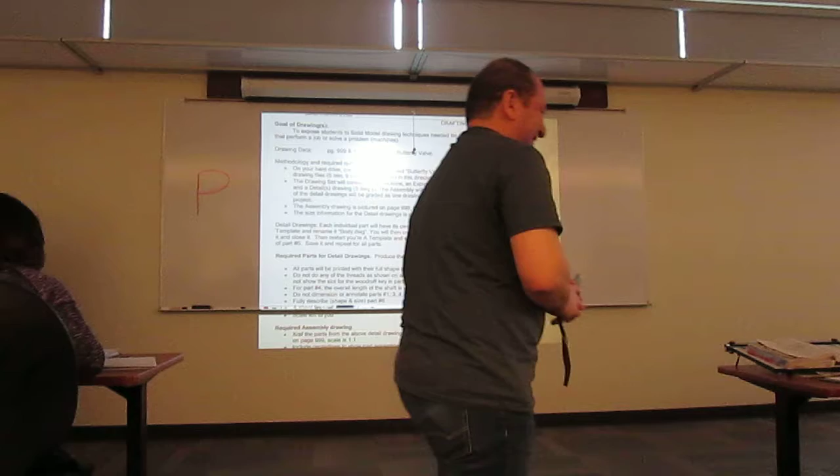all right, when I get here early, yeah, it's sale day. And then I was just like, quick, and they were saying, what's wrong? I'm like, did you see the forecast? We're getting snow tomorrow through for a week. We're supposed to get it tonight. We're still climbing the mountain. Yeah, we're supposed to get snow all week next week. We're just gonna have to bundle up. There's 3 this morning. Oh my. It's like 17. It's just cold. Where is that?

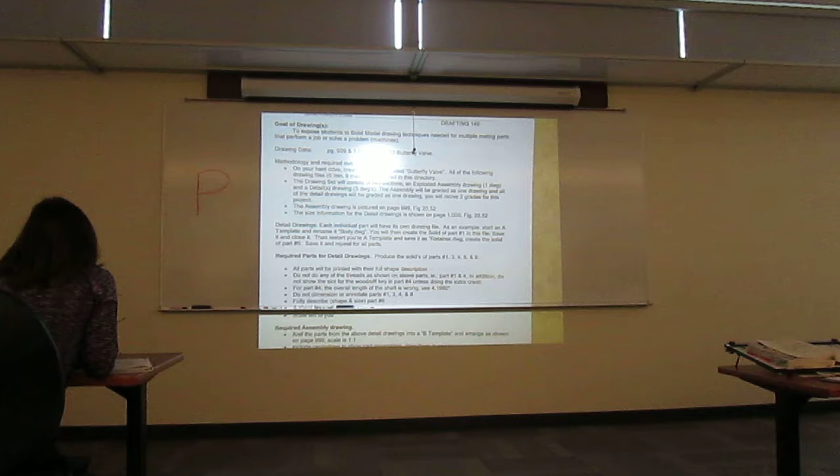You guys that are traveling, use good judgment. Roads are crappy. Hopefully you got a computer at home. You can watch your video. Don't risk your life to get here. I hate missing because of the weather. Like I said, I give myself 2 hours. If I'm not here, they're calling. I would let someone down. Well, the other morning, I couldn't see 5 feet in front of me. That's how bad it was. When it was blowing, it feels like you can't. Not to mention all the accidents on the way. Sometimes you go 85 miles an hour; just slow down to 45. All right, let's get started. I'm not waiting any longer. We got lots to do. Thank you.

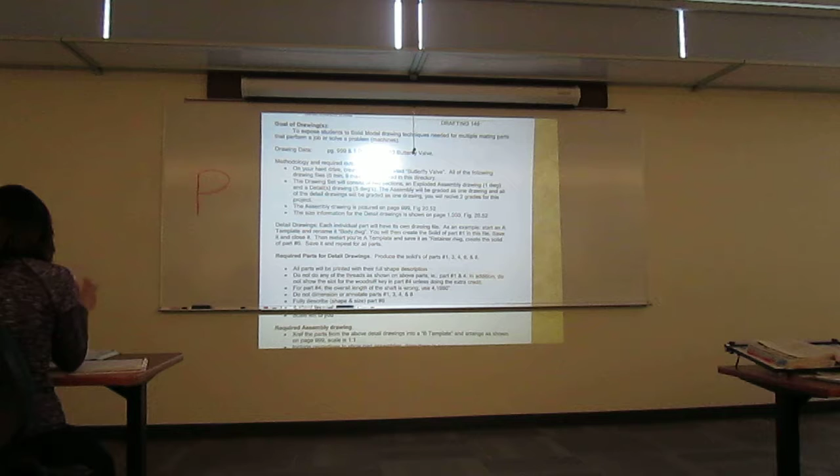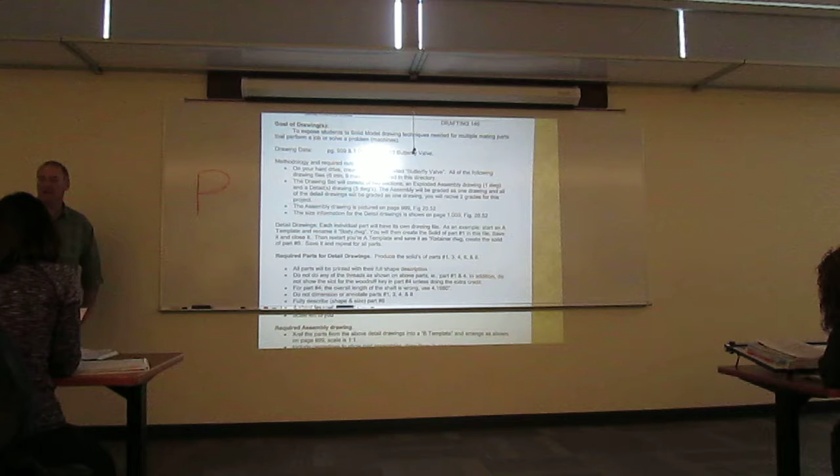All right, so I gave you the last 2 assignments and I want to explain these now. I think some of you are probably ready for assignment 5, which is the one I've got up on the overhead. I wanted to give you number 6 too, which will be your last one, because I want you to start thinking about it now. I'm hoping you're started on it by approximately next Tuesday. Now keep in mind that this class, I hope to have it done by a week from today and testing on it, but you're gonna have a couple extra days to draw after that.

We will start architectural drafting on the following Monday. You need to have that architectural book. If you don't have it yet, get that thing here, because we will have a few days of information before we can really start drawing. Okay? So you'll have a little bit of time to work on that last project also.

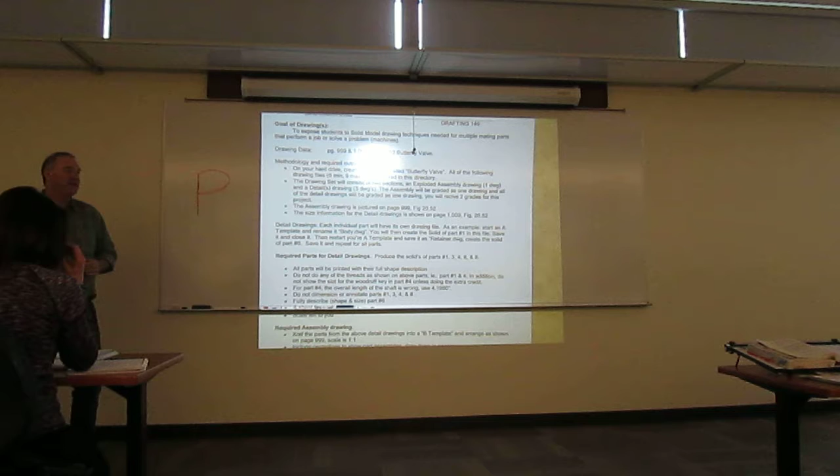All right, so this is really kind of a nice project, and I think it ties this whole thing together on solid modeling. Okay? And it puts it into a sense that many of us will end up working in this arena. So this is a real life type of situation. In fact, people are doing this today out in Twin Falls, as part of getting paid for it, which sorry to say you're not, but we give you good practice at it.

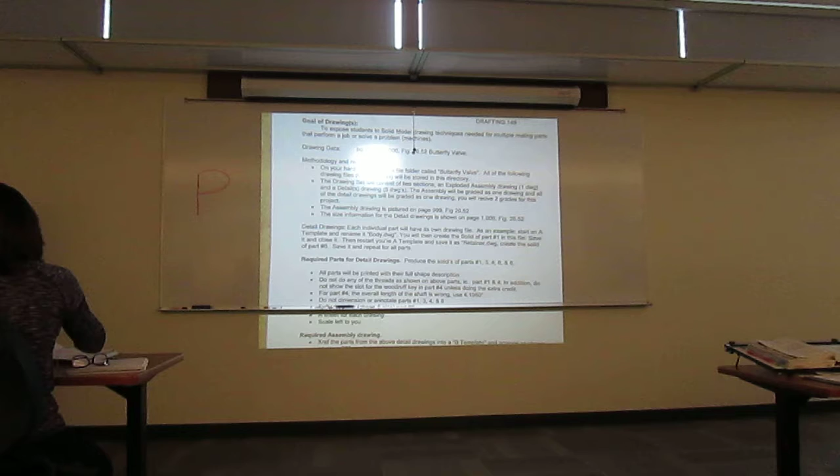All right, now I tried to explain quite a few things here. One thing, you're going to have a bunch of files that you are managing together. So I would highly recommend that you do a little sorting on your hard drive. Create a directory for where all this stuff's going. So on mine, I've got a file folder called draft 149. Underneath that, I'm going to create another directory and call it butterfly valve. And all of these files that I use are going to be stored in that directory, because you're going to have to use these files together.

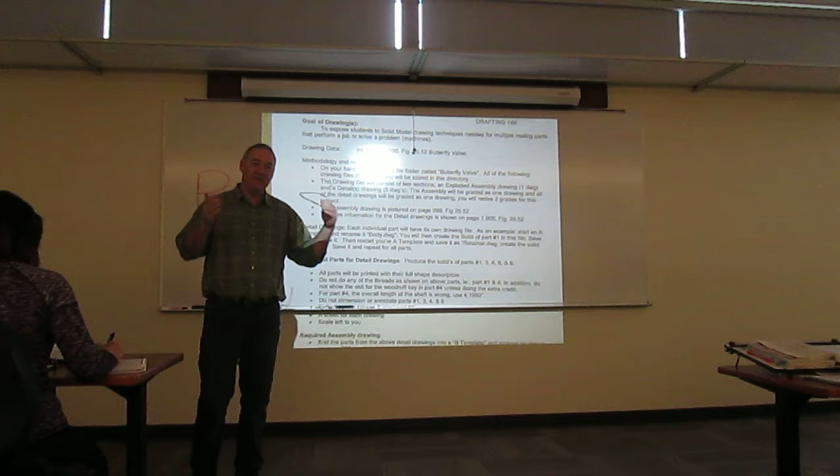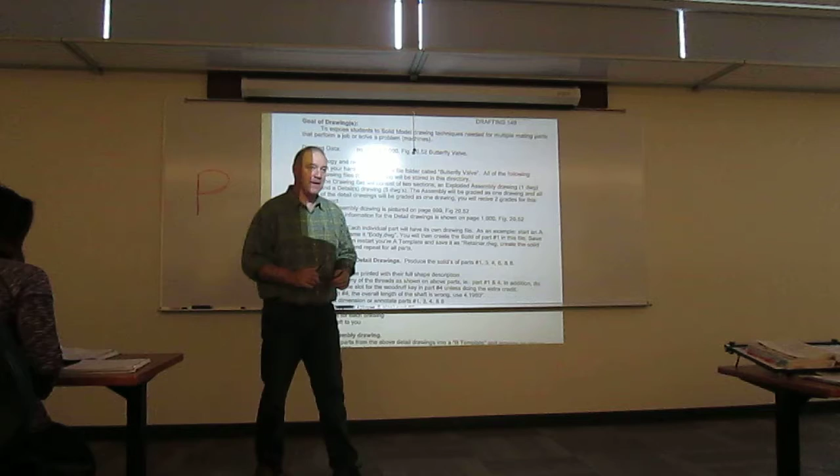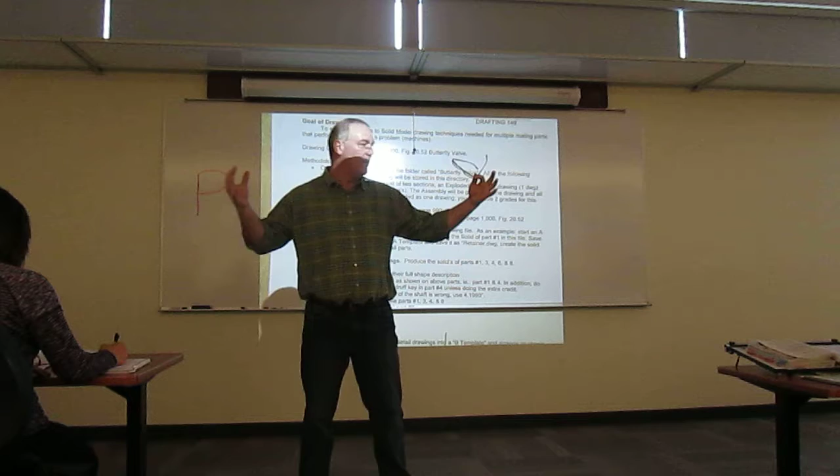Now, when you come through, we're in essence going to have a drawing set that's done in a mechanical sense. When you put together a machine in the mechanical world, you have a drawing set that shows how it's done. The first drawing in the drawing set is an assembly drawing, which shows how all these parts fit together so that somebody can assemble the project.

Following that, we have what are called detailed drawings, which are usually standalone multi-view drawings that we can rip out of the package and hand to a craftsman and they can build that part. Okay. So you've got first one's an assembly, and you might have sub-assemblies in assemblies because the assembly process might be fairly complex. But you'll have something showing how it all mates together, and then you'll have the building information in sheets that follow it.

And these can be very extensive. I mean, think of a car engine. The drawing set for a car engine is probably easily 1,000 pages of nothing but drawings. So many sub-assemblies and assemblies. Now this one, we're just going to do a valve. So we can do all this in one part.

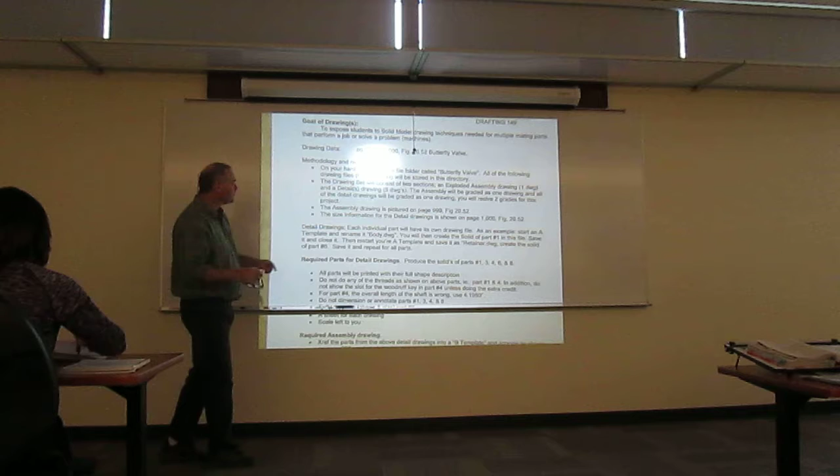So you're going to have first, I'm right here in this methodology. Your drawing set's going to have two sections. It's going to have an exploded assembly drawing, which is going to be one drawing. Then you're going to have a detailed drawing, which shows how to construct all these items, and there's going to be 5 of them that are required.

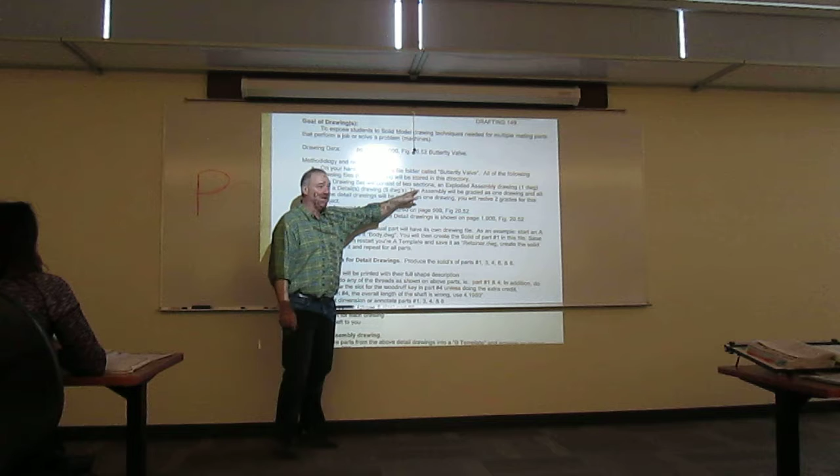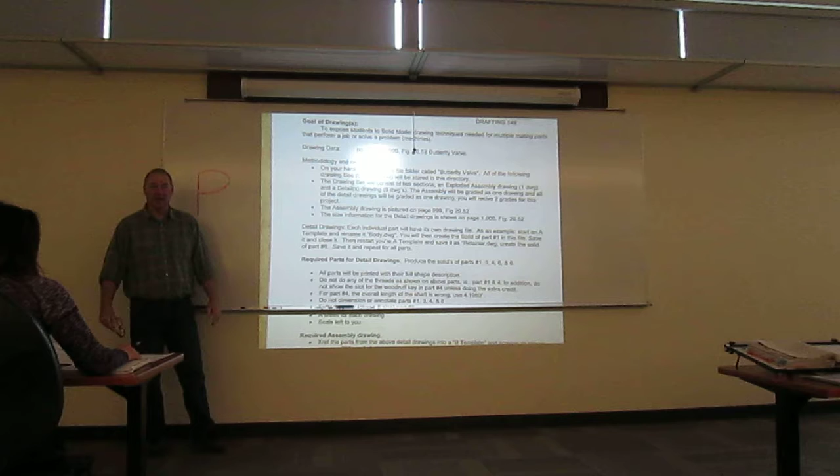Okay. Now, when you're critiqued on this, the assembly is going to be graded as one drawing. All of your details are going to be graded as one drawing. See? So that's how I'm going to throw it in the grade book. You're going to get 2 grades for this thing. You're going to turn in 6 pieces that are stapled together.

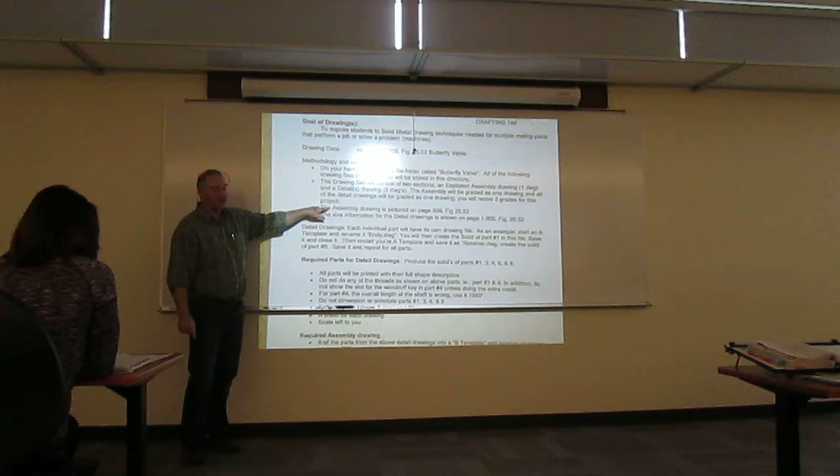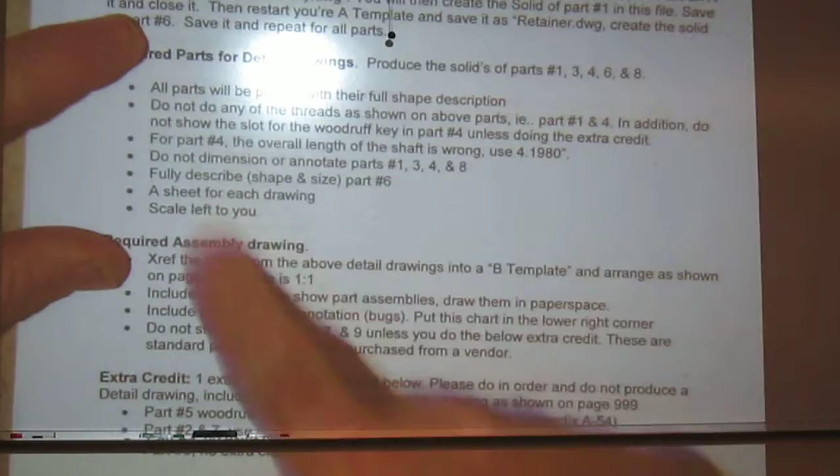Alrighty? Now, let's talk about the individual sections. First, your assembly drawings on page 999 of your Bertoline text. And then the details are on the next. Now, there's some different information down in here that I'm going to come off the monitor with, but we're going to go to the figure here. Okay? So the assembly drawing will look similar to this right here.

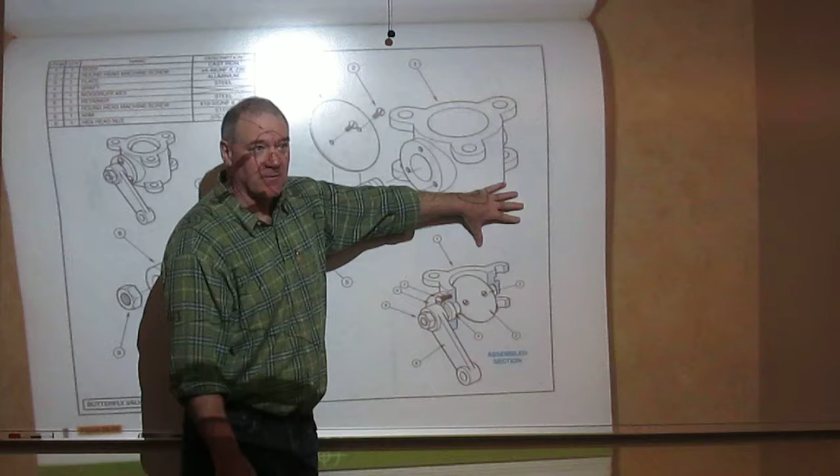Now there will be a couple things different that I ask. Number 1, your parts list. This is in a bad spot. It goes with the title block. Okay, so what I'd like you to do is when you do your parts list, I want it down here because our title block's along the bottom for a B sheet. Put it in the bottom right hand corner right above your title block.

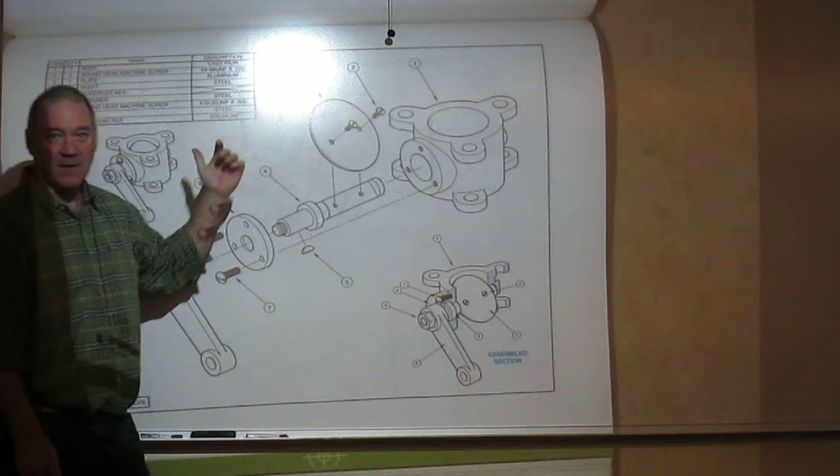We're going to do the exploded assembly, which is this portion right here. Okay. Now this drawing also has more of an isometric view and what's called an assembled section on it. You do not have to do those. If you want to, it's just a couple clicks. Okay? But don't make your page unreadable by giving them this stuff. If it enhances a drawing, do it. If it doesn't, don't worry about it.

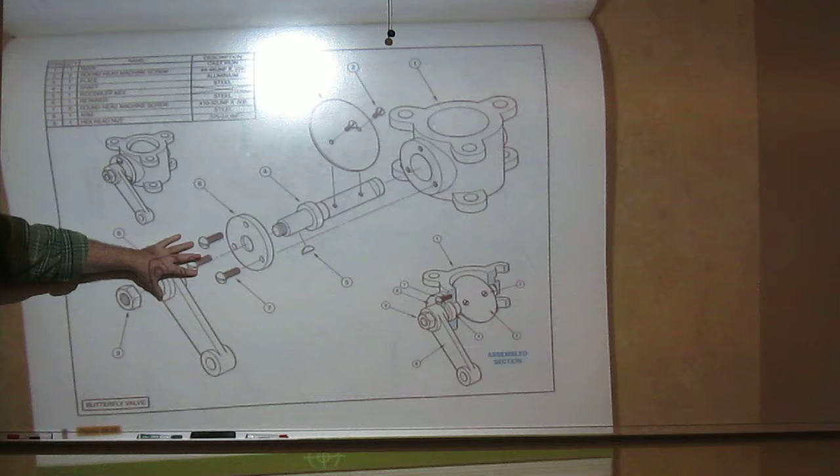This exploded assembly in an isometric orientation is what we're looking for. There's center lines on here showing how all the parts go together. Those are going to be drawn in paper space. You will have to do your bugs. We call these things bugs that go on here. They are done wrong on this. Number 1, they're not pointing to edges. Okay, so follow our standards.

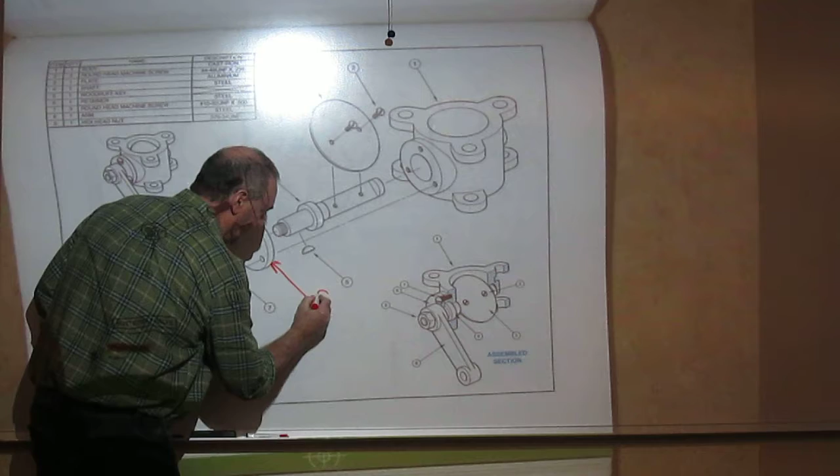Okay, so if you're doing one, it should come off of an edge and it should have a shoulder. And then we generally put that little circle there and we put our part number right there. This part number goes into this, which tells you what it is. So part 5 is a Woodruff key. And so of course you'd want to point to the Woodruff key.

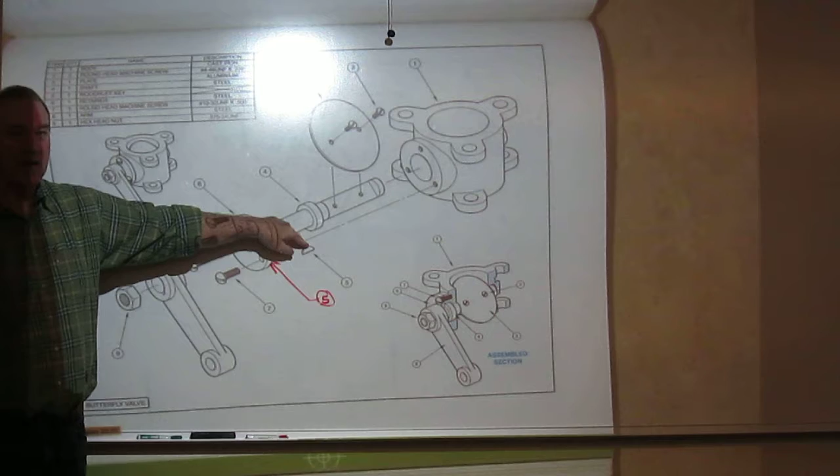Now, many times this will have another column on here saying what page the detail drawing is on. But there's also going to be something that goes. Now, this Woodruff key is a standard part. We're buying it from a vendor. So it's shown here, but it's not shown in the others. And we'll get into more of that in a minute. In essence, this is your drawing.

Okay. Now, if you look down below on required parts for detailed drawings, you see that in bold right there? Following that, you're producing solids of parts 1, 3, 4, 6, and 8. Okay. So you're doing this guy, this guy, this guy, this guy, and this guy. I think I got them all.

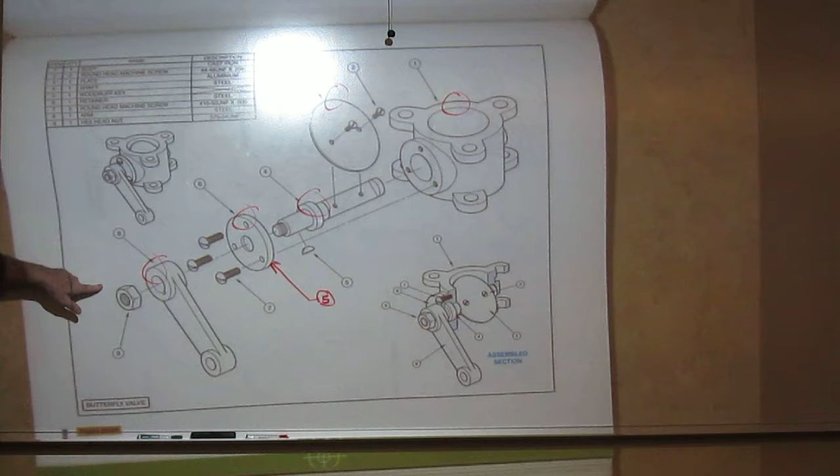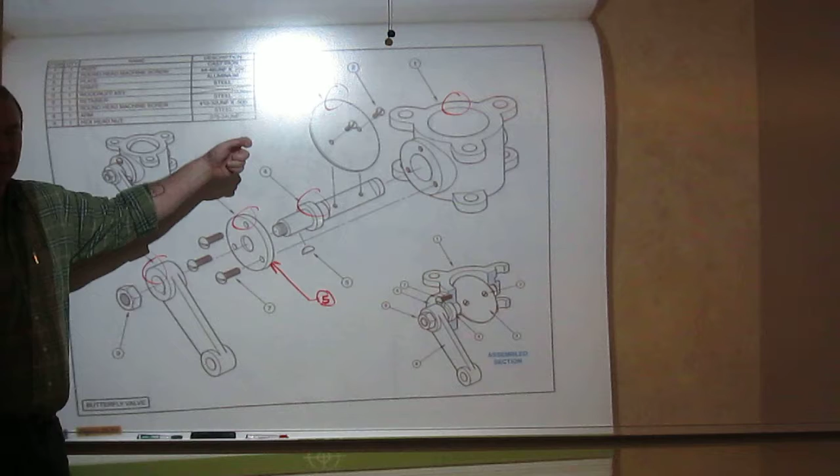This nut that screws on the end of the shaft is extra credit. If you want to do these 3 bolts and these 2 screws, they're extra credit. Okay. The Woodruff key is extra credit. And that's listed down below. You'll find out actually, I give you 1 extra credit point if you do the bolts and the screws, 1 for doing the Woodruff key, and I don't give you any for the nut. But it's good practice.

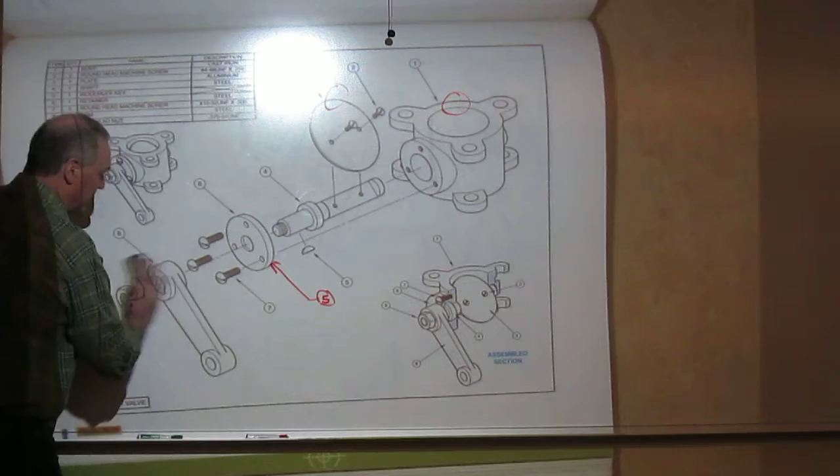All right, so those are going to be the required ones. We're not doing everything on here in the interest of time, but we're gonna do the major parts. Now, I have altered the parts just a little bit, also in the essence of time, and to correct some mistakes in the text. When you're doing your detailed drawings of these parts, if you go to the next page, here is all your dimensional information.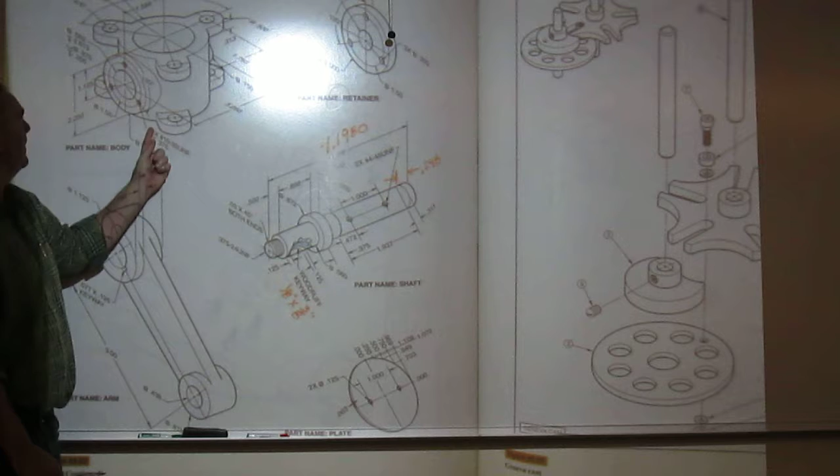Now, if you don't know what a butterfly valve is, let me just real quickly explain what's going on. This is the housing. We're going to have fluid or air coming this direction. That goes through. There's a pipe attached here that heads off. There's a pipe at the bottom that goes somewhere else.

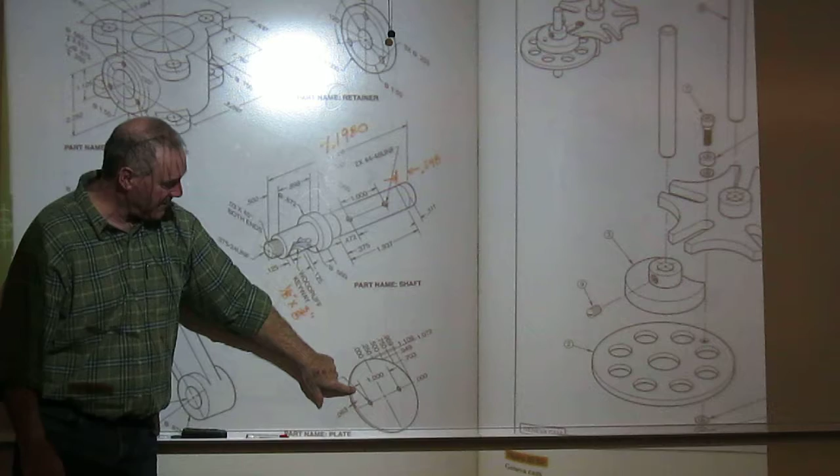You've got a shaft, this guy, that fits in this hole. That shaft has this thing bolted on right here. Okay. This thing right here, when you turn it down, will cut that flow off right in here. So in essence, you stick the shaft in, you put the handle on so you can move it, and all you do is you're rotating this thing up to let fluid through, down to shut it off. Okay. What we call a butterfly valve.

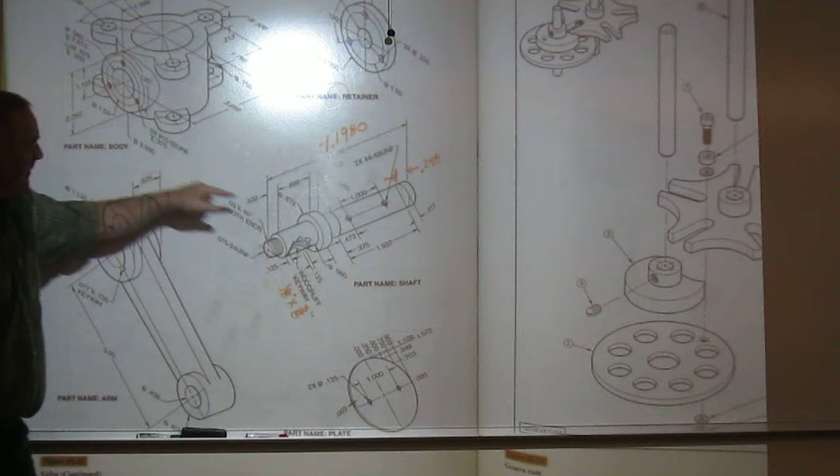The retainer up here gets bolted on right here and it holds the shaft in place. That's what it does. I think everything's pretty straightforward on here except for this. This has a couple mistakes on it. And I've listed these in your details, but I just wrote them right on my drawing if you want to write them here.

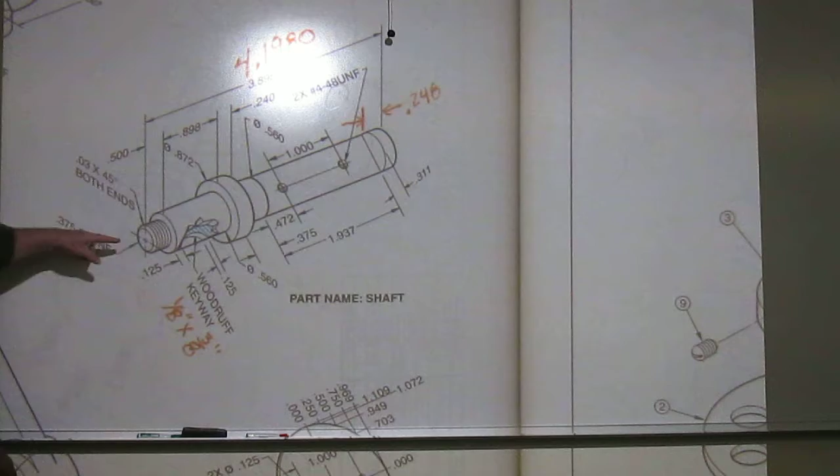First off, this overall length is not right. Got a heck of a glare on here, don't I? Is that easier to see? Okay, that 3.898, it's not even close to being right. And in fact, if you add up these dimensions they give you for the length, you're going to get 3.95 just to there. And then if you try and put it in your housing up above, it's sitting out in the end, it's sitting there wobbling. It's not being held on the other side.

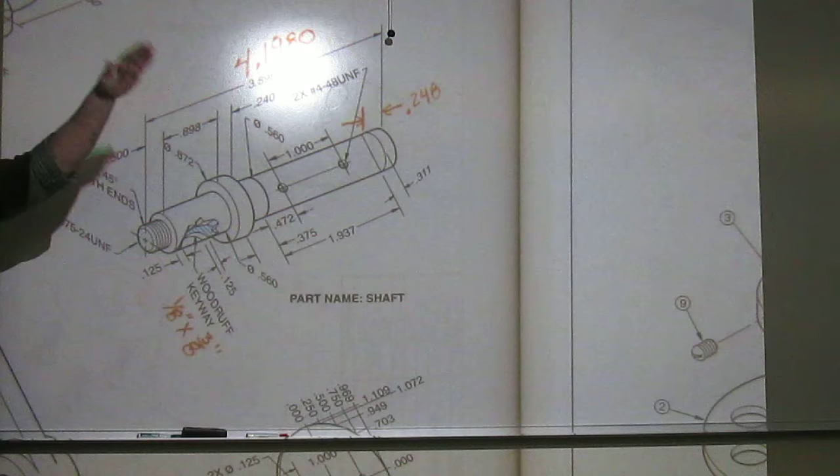Use 4.198. What that does is it gives you almost a 1/4 inch that sits in the housing to hold the back end. The reason it isn't 0.250 is because we wanted 0.002 of slop to make sure it fits. The Woodruff key, which is extra credit, if you wish to use this, use an 1/8 inch by 3/8 size. And how to draw it is in Appendix 54. That's also in your information under extra credit.

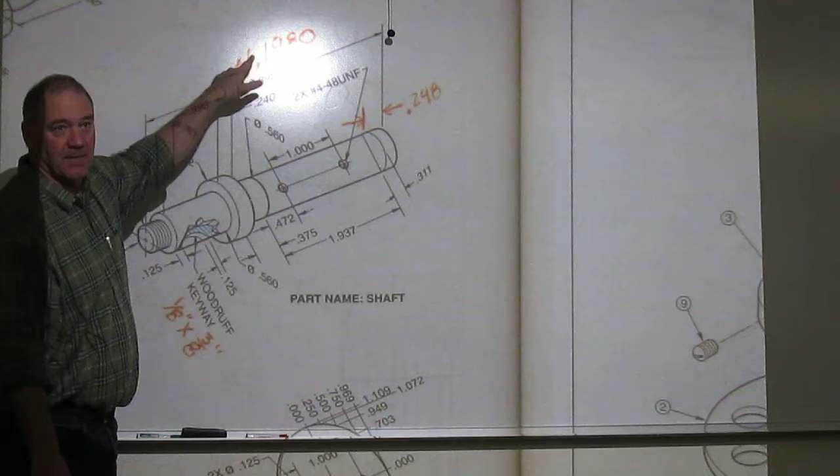When you change this height or length, the only thing you're changing is this right here, okay? That doesn't affect any of this dimensional information for placing this stuff. Can I just, what does the Woodruff key thing do? What is it? Woodruff key holds the handle onto this shaft right here. The handle slides over this piece right here, and then that nut screws on to hold the handle. Now, when you turn the handle, you got to link this shaft to the handle. Yeah. A Woodruff key is a little half-moon shaped key that slides in where I don't have access to come in from the side. Oh, so that's what that key thing is? Yeah.

Declan, you told me at one time you think you might have some of these. I think I have one, yeah. Is there any chance you could bring one in, we don't have to keep it, but maybe just show people? I don't have one here. I can go look and see if they still have it. Okay. If you can't, let me know and maybe I'll swing by Ace Hardware somewhere and grab one. Okay.

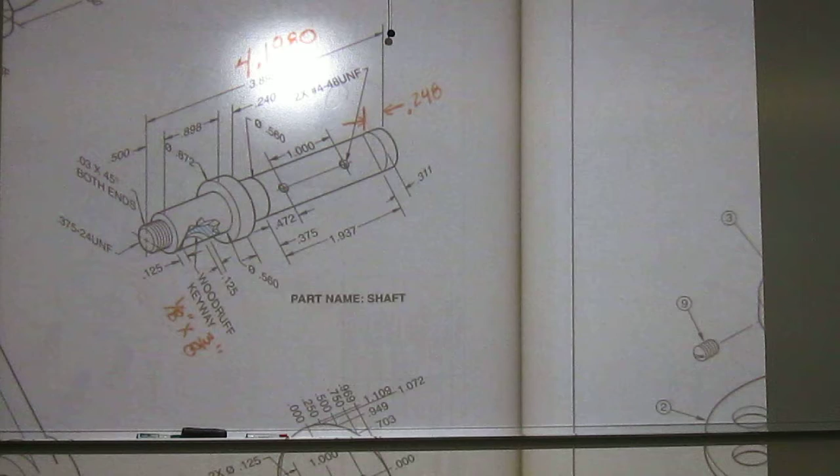I do have a shaft that's set up for a Woodruff key already. That's permanent in there? What is that Woodruff key? No, it's for maintenance. That's why we use keys. We can take it back apart. But I mean, it's inside the shaft, but it's attached. This engraving is part of the shaft. Yes, that's permanent. Okay. Now, here's, you can replace it.

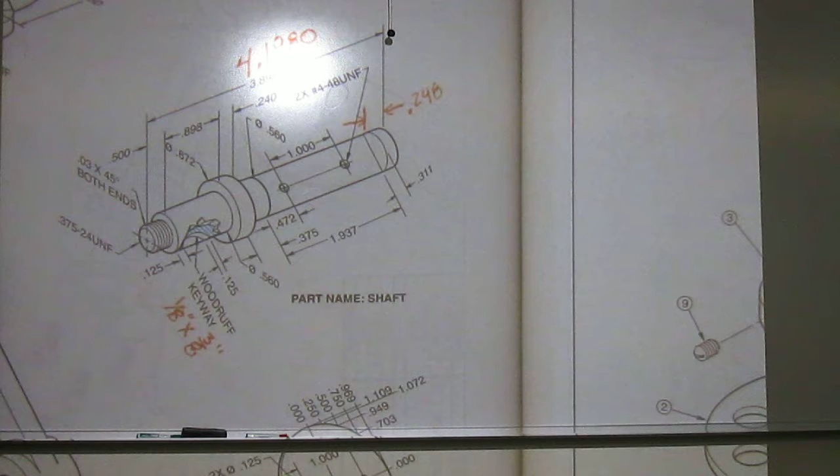Get down into your details on this. There's a couple things. You're not doing the Woodruff key unless you wish to do it for extra credit. So therefore, you don't need to do this slot in the shaft. Because if you're behind schedule time-wise, I want you to finish the project first. Now, if you're going to do the extra credit key for the Woodruff, it's a pretty simple thing to slap it in here and subtract it and get the shape. So you can't put that in unless you draw it anyway, so it's not required.

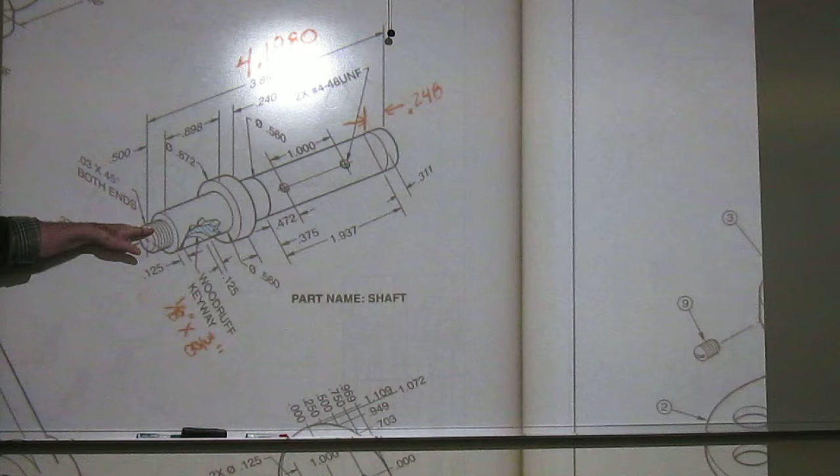It's extra credit. The threads are not required, they're extra credit. And in fact, I don't even really want you messing with this one, I'd rather have you doing the screws and stuff first. So just take this, use your major diameter, it's a 3/8. Here's your thread note. Just take it and draw it at 3/8 and leave it a solid piece without any threads on it. The same with up in the body.

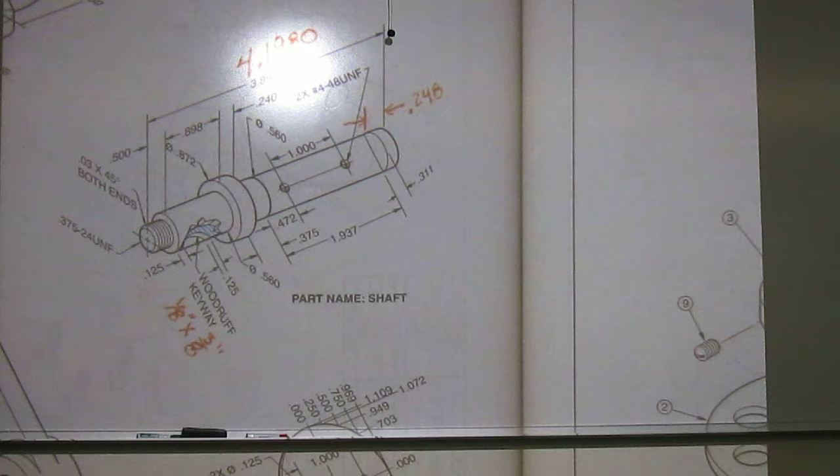The body has some internal threads on it. Up in where these holes go in, right up in here. Just use the thread diameter and make them cylinders.

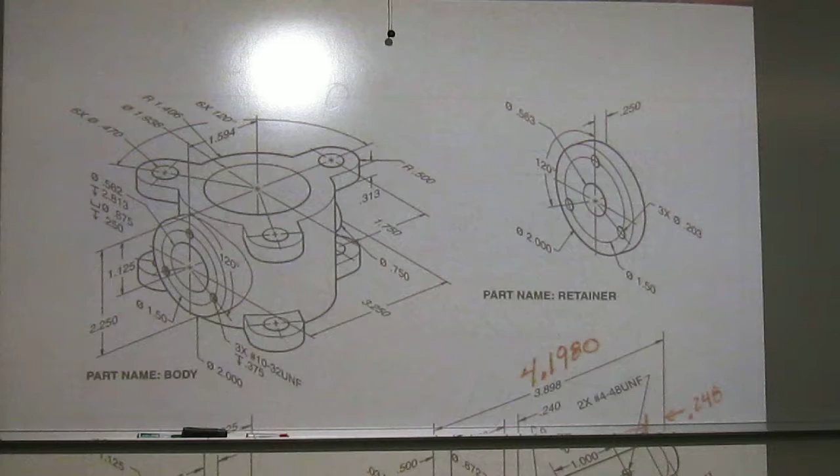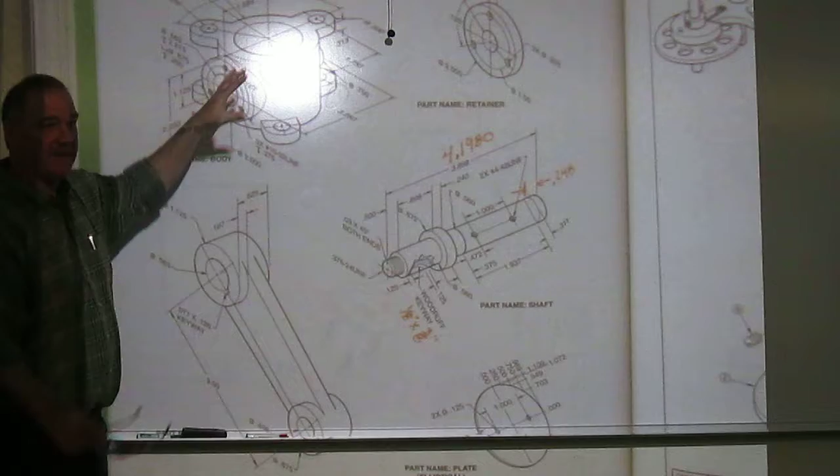Okay, now also on the details. Remember, each one of these is going to be one drawing file. So you're going to open a template, have this, model it. That's the only thing in that file. Shut it down once you're finished. Start a new drawing, model this. Save it, close it, start a new drawing, do this.

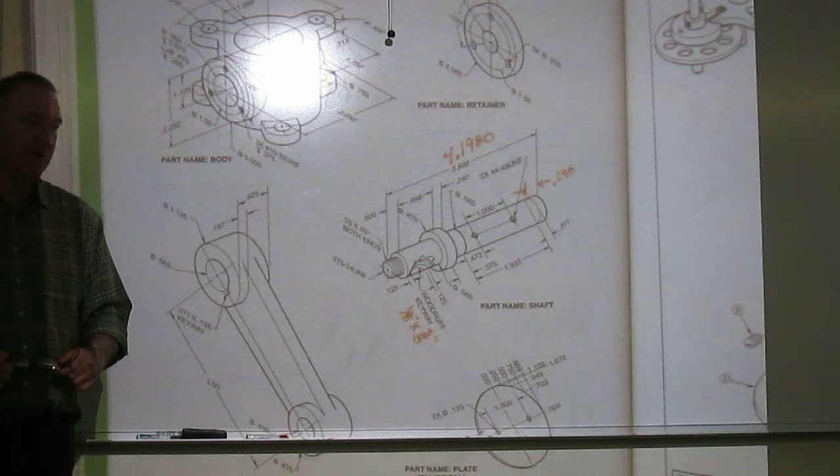You're not putting all these into one drawing. Okay, so don't just do one drawing and start modeling away. The reason is it gets to be a pain to print these things and put dimensions on them if you've got a bunch of models you're dealing with in one drawing. So generally they're done one drawing per file. Okay.

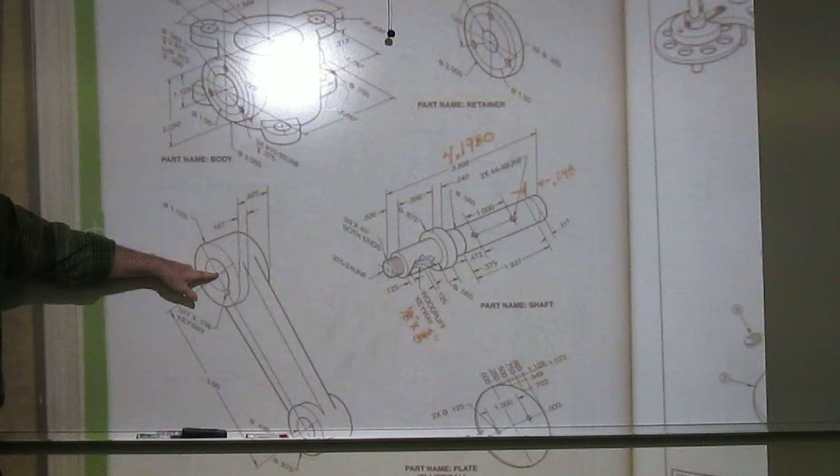You are producing the multi-views of all of these parts for construction. You are not annotating any of them except for one. You're going to annotate this one. Wait, which one? Did I do the retainer? Which one did I ask you to annotate? What? The retainer? Okay, thank you. This one. I tried to pick the one that would be the easiest to dimension.

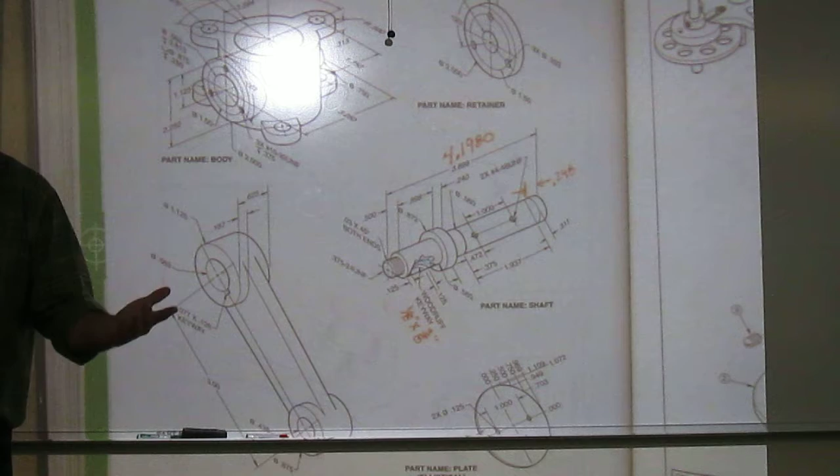And this is again in the interest of time, right? It would take us a substantial amount of time to produce the multi-views and dimension this. So you're producing the multi-views of every single part. Scale's left to you, but you're doing the full working drawing on this one and this one only. Okay. Does that make sense?

Now, once you finish these, then you've got about maybe a 20-30 minute operation to create your assembly. You're going to take all these drawings and XREF them into one drawing. Apply them in an isometric sense so that you have the exploded assembly shown. In essence, you don't draw the exploded assembly. We're just XREFing all these drawings into one and displaying. Let me kind of give you an idea of how this is going to work.

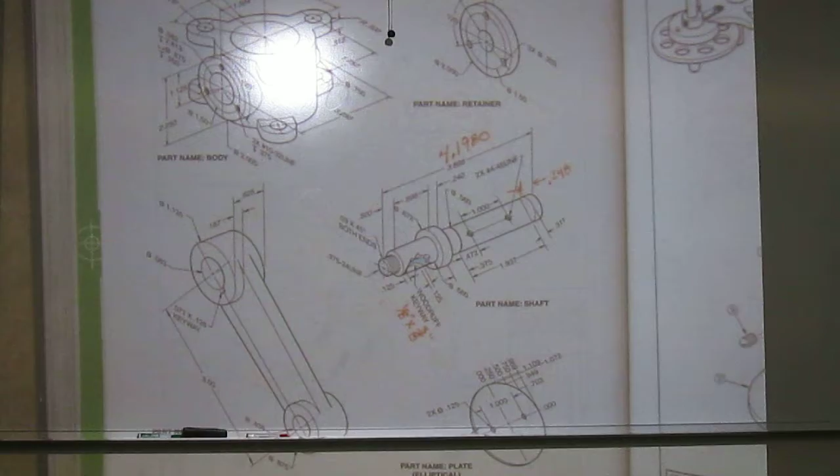Okay, so in essence, here's my file folder right here. If I jump into that, here's all the different drawings that are going with this project. Now, I've got most of the extra credit drawn in here, so there's more than what you might have. You're going to have 6 drawings at a minimum for the whole project, 9 at a maximum. So if I come down, here's one of the drawings. So here's the valve assembly. And it's drawn in its entirety.

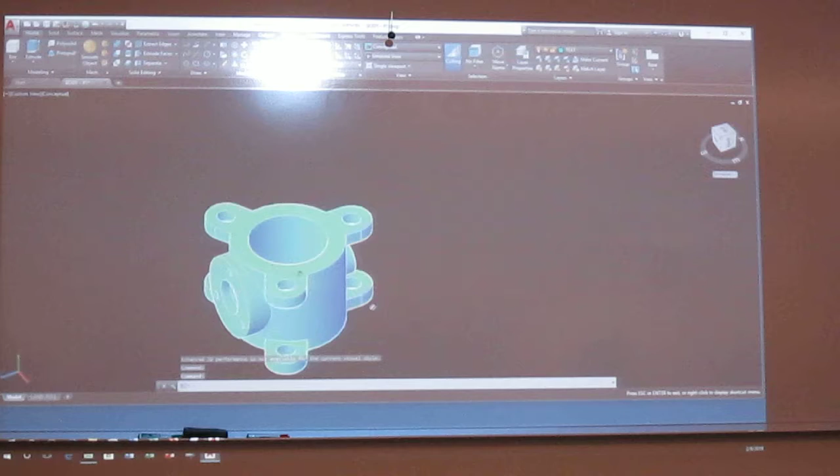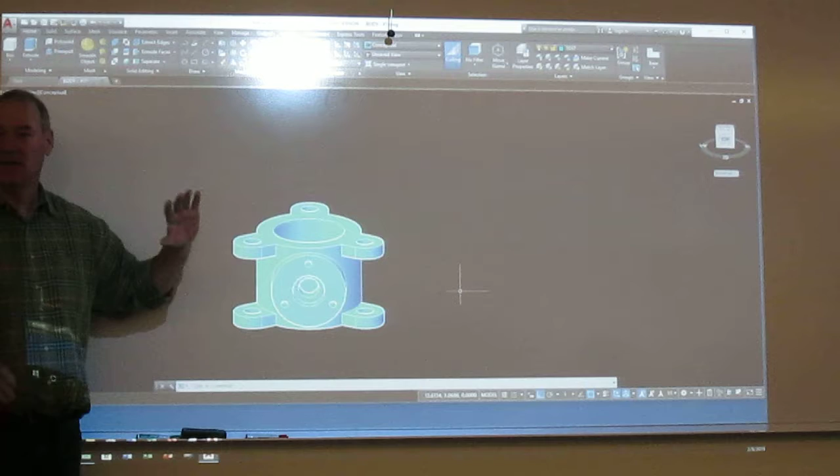Now, one thing that might help you is picking the correct front view for these. Because I've got to dump all these into a drawing that shows how it's put together. So I chose looking down the length of the shaft as my front view for every part of the drawing because it's all sitting on there. So that way when I XREF them in, I just slap these to a front view, drop them in a drawing, and they're already all aligned. I don't have to do any moves and rotates and all that stuff. So do this as a whole. So here it is.

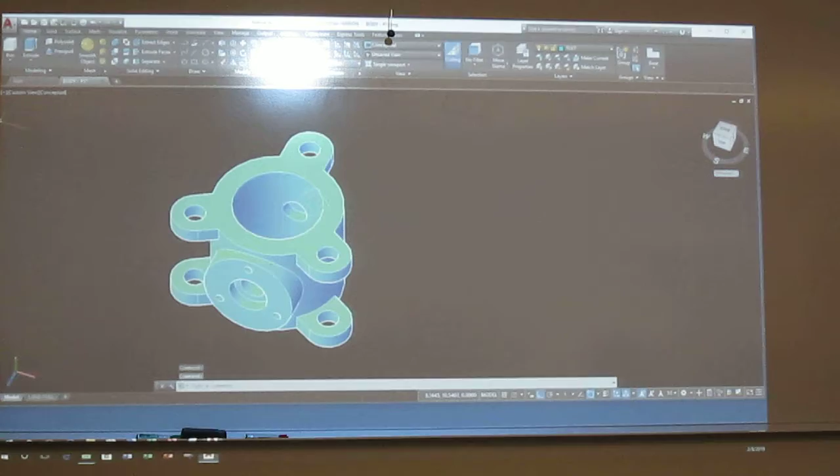This little hole in the back, this is the part for that shaft that we had to change the length for so that it holds in the back. And that dimensional information in the body is correct. It's not correct on the shaft. That's why we changed that. So there's one drawing. Here's another drawing. This is just another solid drawing. And all you're going to do is make all these drawings.

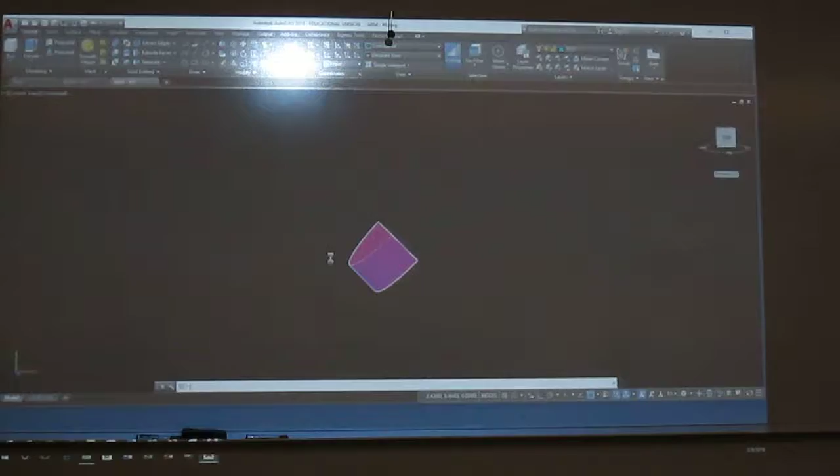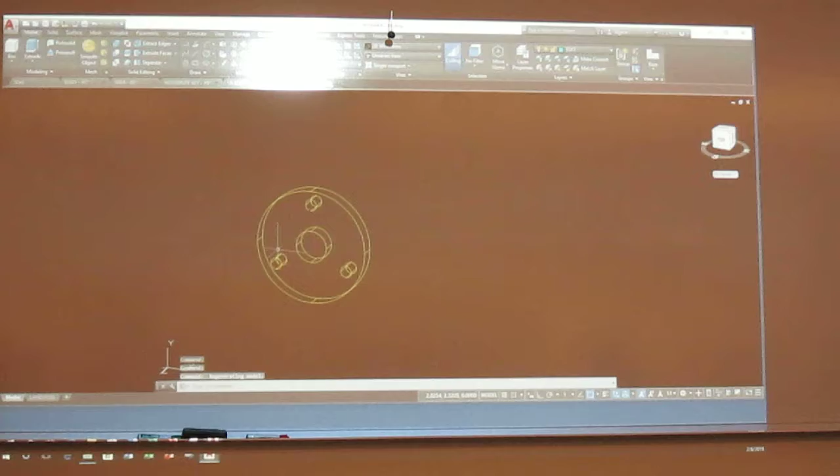If you decide to go for some extra credit, there's our Woodruff key. If you want to do, here's my little pan head. Here's my retainer. Now again, this is the one you're going to do the completed finished drawing on. So you're going to dump this into view base and then draw all your center lines and dimension this one.

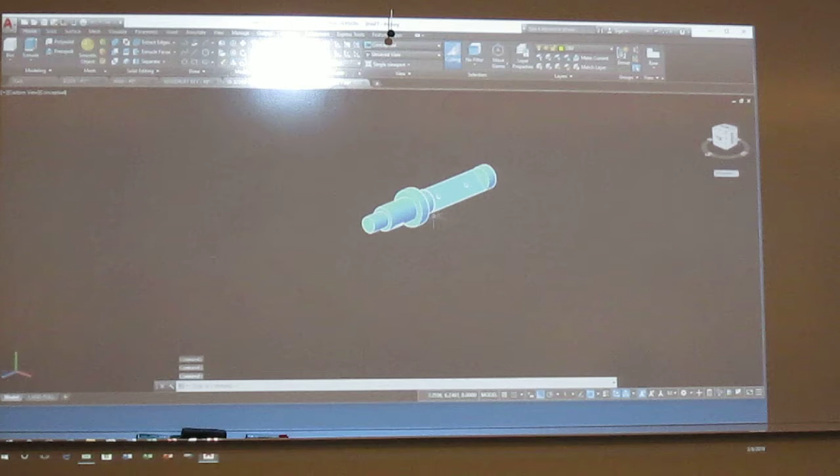Let's see if I missed any parts. Oh, my shaft. Okay. So here's the shaft and its orientation. Now this one I went and put the Woodruff key in. Notice that I don't have the threads out here, things like that. So this is in essence your finished project. So you're going to have these drawings, do view base on all of them, as many views as they require, just don't annotate them except for the retainer.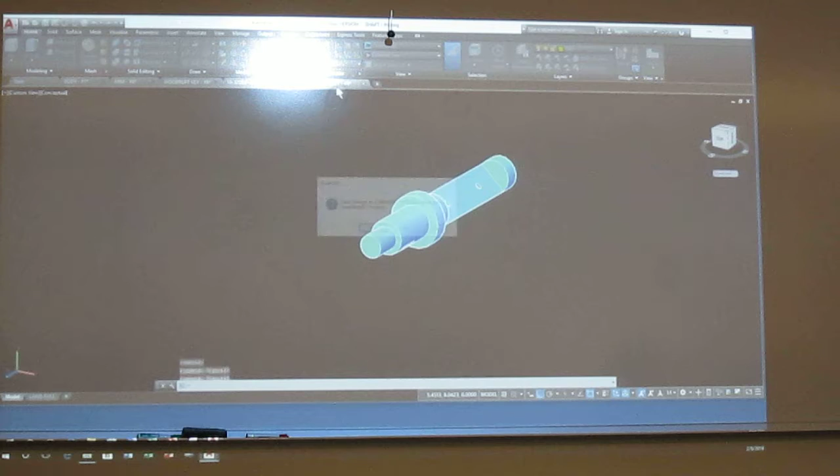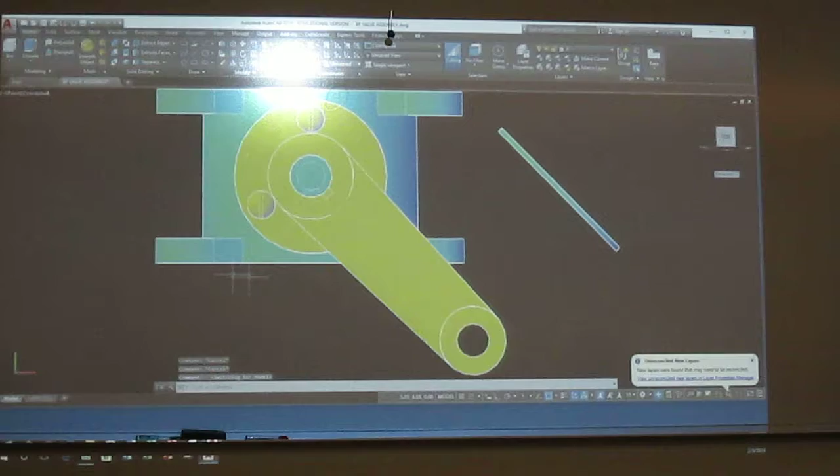Now once you're done with that, let me close a bunch of these off. You're going to then use XREF to throw these things in. And let me open that drawing, I got one more to show. Okay, so here it is sitting in model space. Now, all I did is dump these in on one plane. I dumped all these in at 0, 0. And then I went to my right side view and then just started sliding individual ones out. And that's the beauty of having it on the front one and dropping it in.

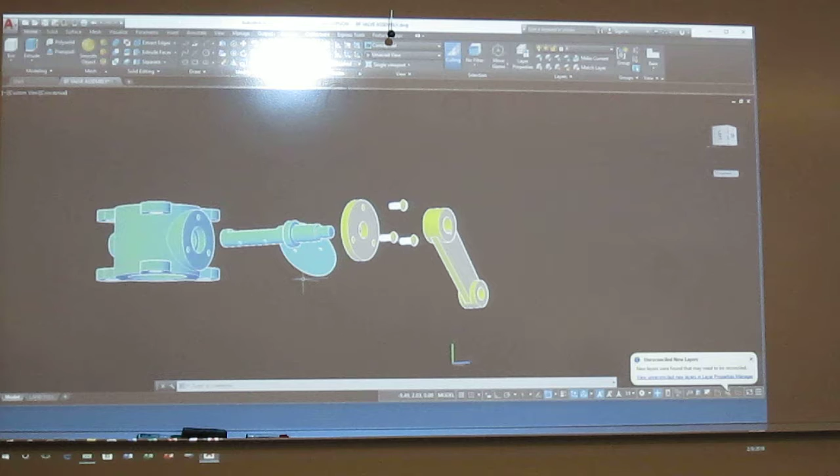And I can help you with this when you get to that process, because it makes it easy. So here it is in model space, where everything's kind of aligned. And you're going to have to play with it a little bit so that when you get to this view, you've got to be able to read it, right? I didn't hit F1. So if you set it in an isometric, let me just choose one here.

You want to make sure that you can see the parts that you need to, because if they're too close together, like this guy is maybe right here, now I start blocking things off, right? And it's totally up to you on how far apart these things go. You just want them to read well.

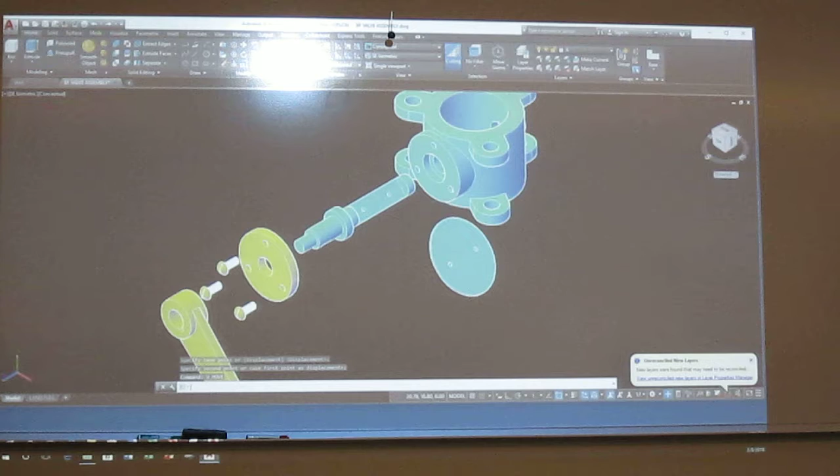Once you do that, then you're going to go to paper space. You'll set it in this orientation. You don't have to, but you can do it with view base. This just got view base on it. Turned off all the hidden lines because it's an isometric drawing. There are no hidden lines with isometrics, right? And then I just drew my center lines in.

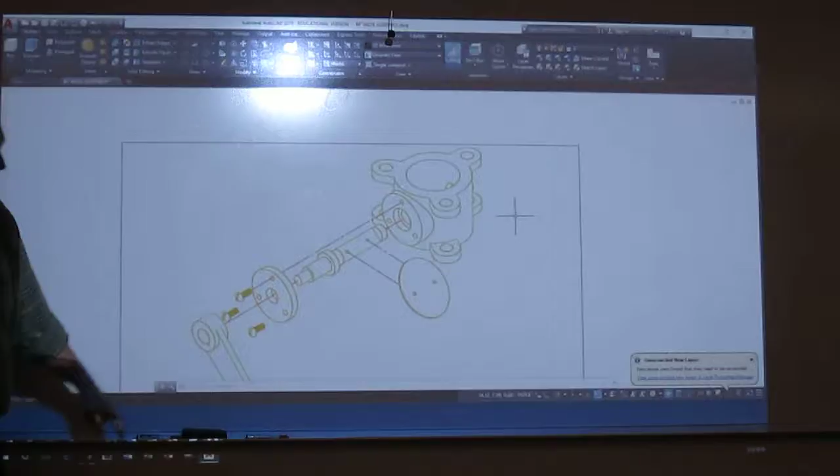Okay. I haven't put the balloons and the title block in on this yet. I just started doing this project last year. But that's going to happen for my key, and I do that right here. So the dimensioning of the retainer is only done on its main view, not it. No, it's a 2-view drawing at the minimum. I know, but we don't have to put the dimensions of the retainer on this view. That is correct. There are no dimensions on this view.

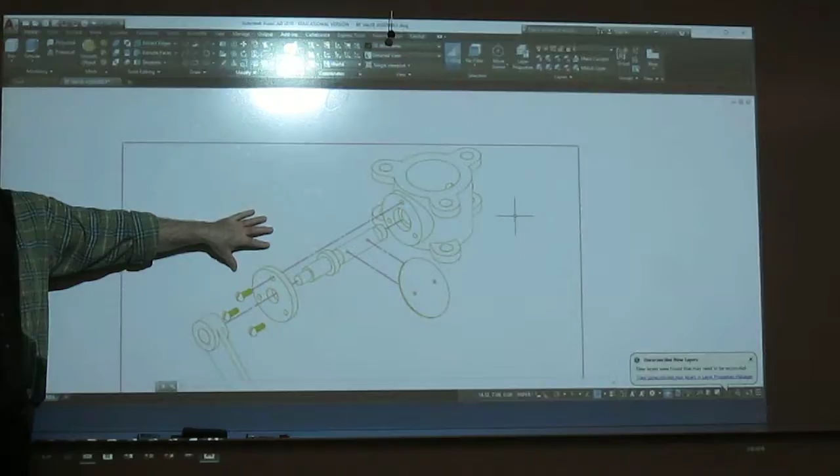This is an assembly. Now, one thing I never mentioned, on assemblies, especially an exploded assembly, which is probably 90% of all assemblies, they are done in an isometric orientation with center lines showing location. All parts for the machine are shown here. Now, you don't have to because you're not drawing these nuts and bolts and things like that. But if I was doing this in real life, I would do all of my parts.

The details that follow the assembly that I do multi-views of are only the parts that my company is building. The other parts we call standard parts. I'm buying them from a vendor. I don't need to do a detailed drawing of a 10 by 32 UNF thread if I'm going to walk down to Ace Hardware and buy one. Okay, I do need to show where it goes in the assembly, but I'm not building it. So this is kind of how it works. On most assemblies, every part's shown, but you only do details of the stuff you're physically building. In essence, that is your finished project.

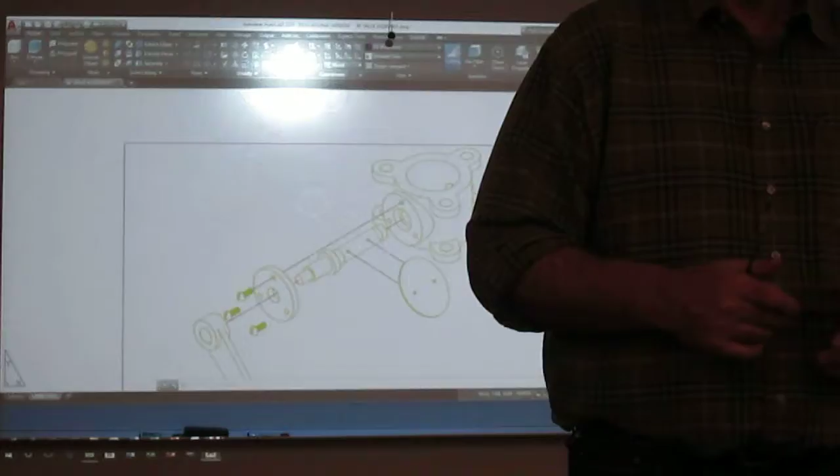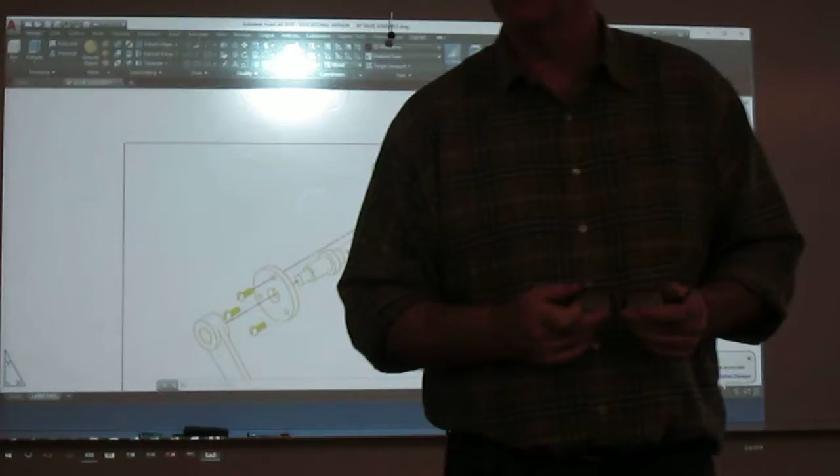If you do something in this orientation, I'll tell you what, Seastrom's Manufacturing builds these in town. Lang pumps, that's who I always used when I was mining. I used Lang right out of Twin Falls here, no matter where I was in the world. The Grundfos pumps are the best, and they're the distributor. They do this stuff all the time. There's several firms here locally that would do this stuff for you.

Yes? Centers on the center lines. So the one in the middle of the shaft, you don't have to see, you just have to extend through the handle? You want to just kind of make these look good. Okay, so you don't have to see the other side of the handle thing sticking out so far. Yeah, I just drew it from here to there, and then I just came in and started doing little lines and trimming so they're not out.

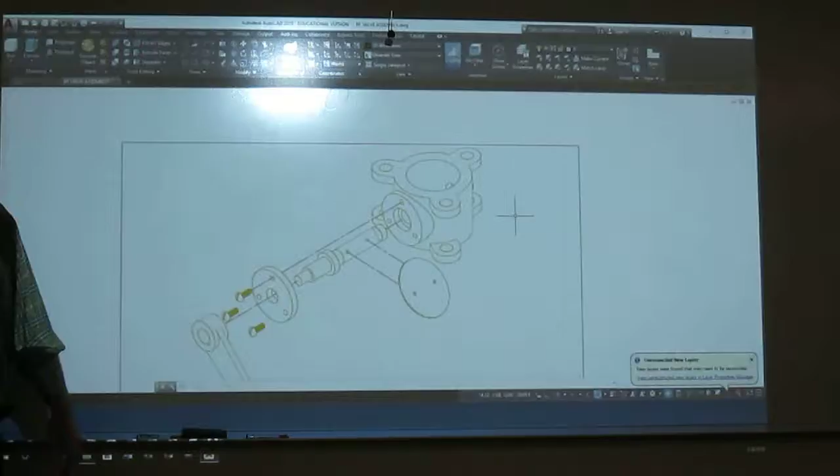There are no standards, like it doesn't have to stick out 0.05 or whatever? Right, okay, but it shouldn't go over the top of this. Well, no, I know. Yeah, but it doesn't have to come out with the handle either. Right, okay? Okay. Fun little project.

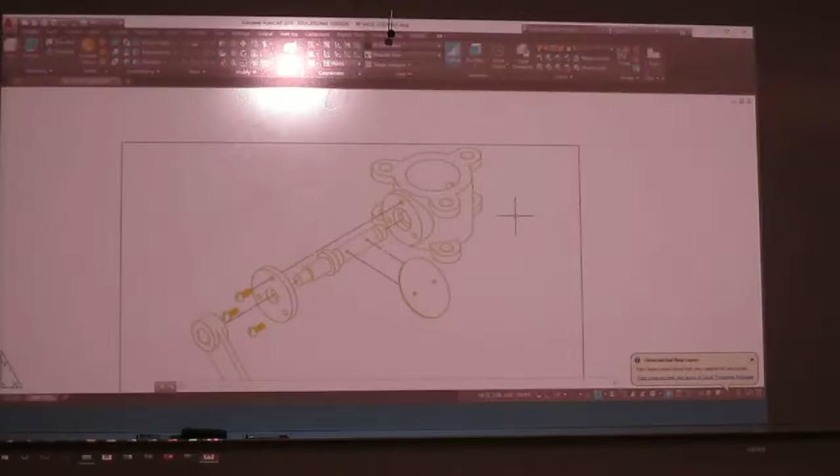And to be honest with you, if you can do this and get it completely done just to our base minimums that we got, any firm in town will probably hire you that does this type of work. This was totally cutting edge 5 years ago. Now it's starting to move into mainstream. 5 years ago, there were very few firms that would do this. I think in the next 5 years, everybody's going to do it.

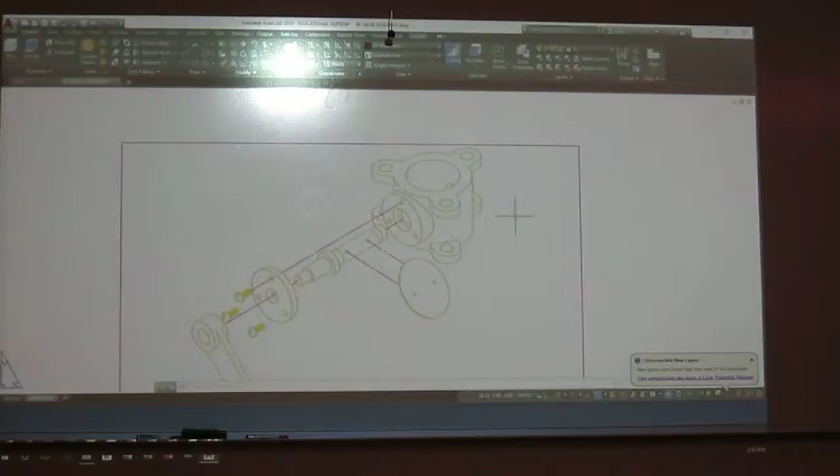But it's an advantage of doing it solid and using it in multiple formats. If you did all this 2D work, you'd be redrawing all these. This assembly used to be a flat drawing, drawn in isometrics. We've got the solid, we don't need to do that. And these are just X-Ref'd in, folks. Blank drawing. The only thing in here is those center lines right now. Everything else is X-Ref.

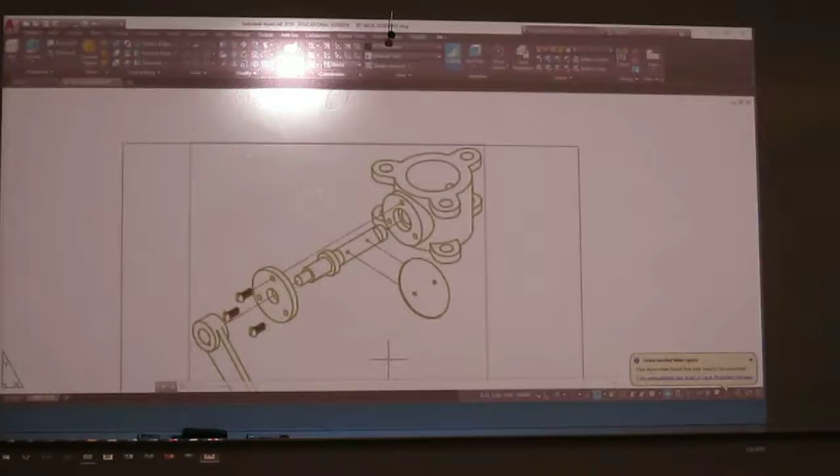Yes? Can I ask you to do an example of the X-Ref again? When you get there, give me a holler. And yes, before you do, I'd probably ask you to review chapter 30 out of the blue section. Okay. All right, now for the last one. Okay, so that's what you're going to have there. What many students think is the funnest project of the year.